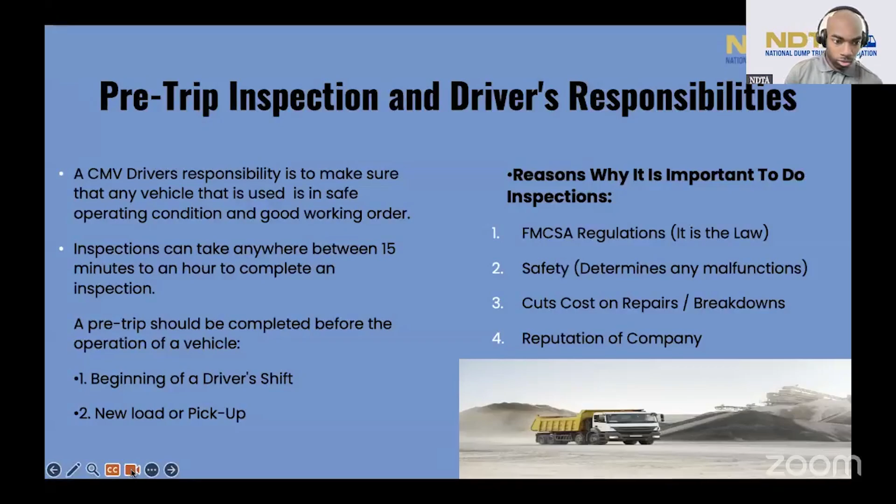Can you see it? Yes. Okay.

So, pre-trip inspection and driver responsibility. A commercial motor vehicle driver is responsible to make sure that all vehicles used are in good, safe operating condition and good working order. So basically what that means is if you drive a commercial motor vehicle and you're a CDL driver, you're responsible to do a pre-trip on that truck at all times.

A pre-trip inspection can take anywhere between 15 minutes to an hour to complete a total inspection. A lot of companies say, oh, 15, 30 minutes. You need to take as much time as you need to make sure your truck is in good working condition. I suggest in doing my trainings, you do at least 30 minutes. Some people, when you're seasoned and you know your truck, do 15 minutes, but I suggest you do between 15 to 30 minutes to an hour to complete an inspection.

A pre-trip should be completed before the operation of a vehicle, beginning of a driver's shift, or a new load or pickup. So that means you wake up in the morning, you get to your truck, you should do a pre-trip right away. That should be the first thing. Once you get in the truck, get your paperwork out, get everything together, do your pre-trip, walk around the truck, check everything. Anytime you pick up a new load, you should do a walk around and check your truck.

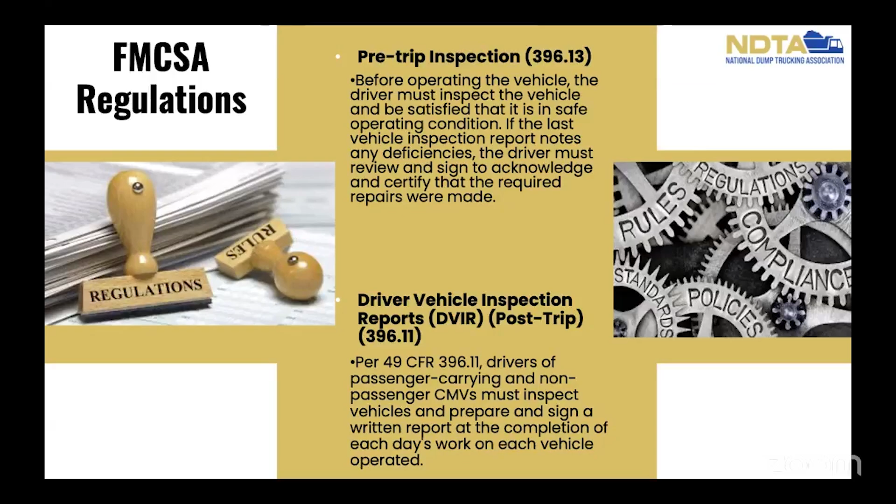So basically, a DVIR is a formal document that confirms that you completed your commercial vehicle inspection, and they can be done in different ways. Some people do paper ones, some people do them on the ELD. It just depends on what your company allows and what the regulations allow you for the type of vehicle you have. There are different settings and different ways you can do it. We can go to the next slide.

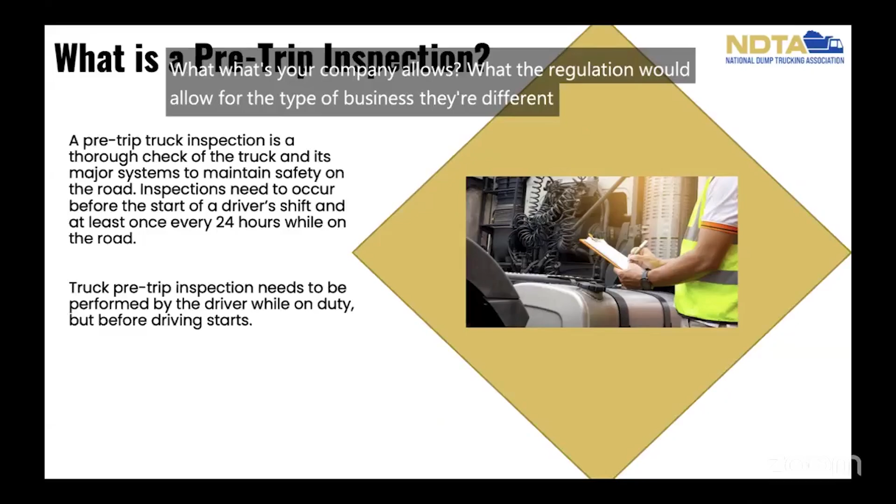What is a pre-trip inspection? A pre-trip inspection is a thorough check of the truck and its major systems to maintain safety on the road. Inspections need to occur before the start of a driver's shift and at least every 24 hours while on the road. Pre-trip inspection needs to be performed by the driver while on duty, but before the driving starts.

So just say you have a truck and you have two drivers. One may do a night shift, you do a day shift. Just because the driver at the end of the night did a post-trip inspection doesn't mean you just jump in the truck. Oh, I read this report, everything looked good. How do you know your owner might have done some maintenance work on it overnight? It could have had damage from weather or something. So it's your responsibility before you do your route that you check the truck and do a pre-trip inspection.

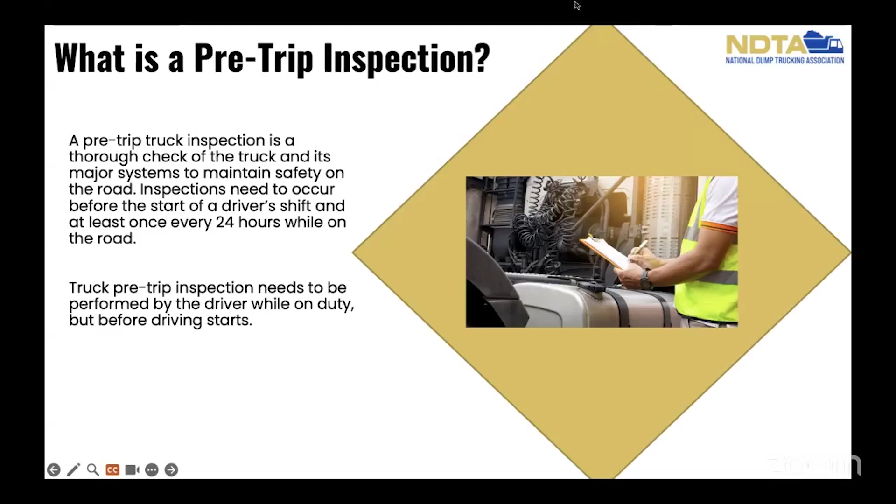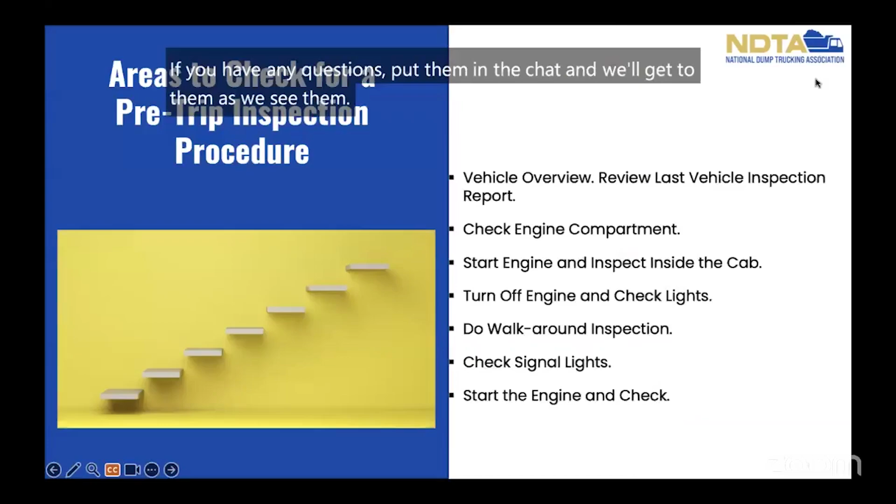Right. Areas to check for a pre-trip inspection procedure. And the first area is the vehicle overview. That's basically just walking around, looking at the outer parts of the vehicle, just checking the overview, checking your last vehicle inspection report. So just say it's Friday, you're getting off, you do your last check, you go home, you park your truck, you come back Monday.

First thing you should do is just overview your vehicle, look at everything, make sure all your paperwork's up to date, look around, and then review your last vehicle inspection report. So see what you wrote Friday to make sure there was nothing pending that you need to get fixed or you left in the shop that needed to be fixed, and confirm that it's been fixed. Check your engine compartment.

That basically means pull the hood up, look under the engine, look around it, make sure nothing's leaking, make sure nothing is wasted on the engine, make sure everything is clean and no debris is there. Start your engine and inspect inside the cab. So always inspect inside your truck.

Make sure your air brakes work. Make sure nothing's protruding or stopping you from pressing on the brake pedal. Make sure your truck is clean. You know, that can be a violation, not keeping your truck clean and safe. Having stuff all on the floor could impact your stopping or cause an accident or something.

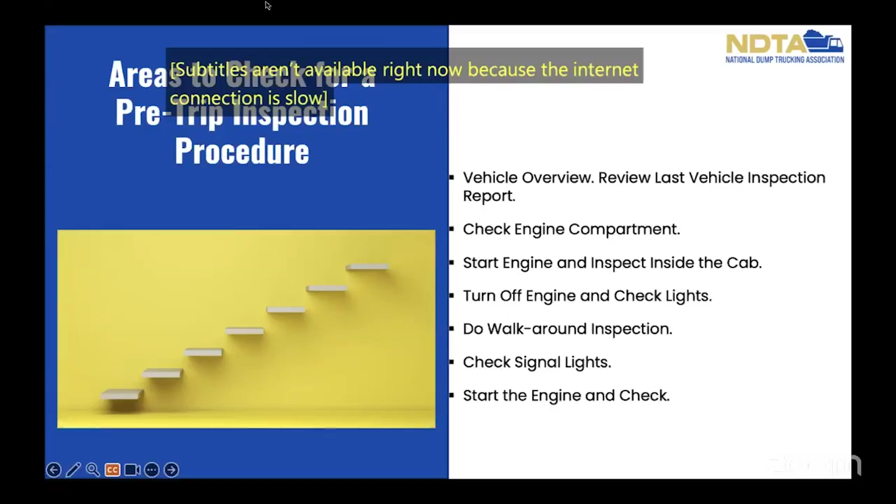Turn off the engine and check lights. Do a walk-around inspection. And that means walk around for your inspection. You know, people say go right to left, left to right. Whatever's comfortable and gets the job done is really based on how you feel about doing it, as long as you do a thorough check and you check everything that's on those checklists. Check your signal lights. This is a big one.

If you have a partner or somebody out there in the area, check your lights, or pull in somewhere where you can look in the back, like a wall or something, and see your lights come on and make sure they're working. Start the engine and check and listen to it. And some guys get up under the truck. If you ever do get up under the truck to check the brakes and everything, make sure you put the chocks behind it so the truck won't roll.

I remember once I was doing an inspection and the guy's air brakes were messed up and the truck started rolling with the chocks. And I shot up from under it. So make sure you take safety precautions too when you do your pre-trip and post-trip. You can go to the next slide.

What is a post-trip inspection? Drivers are required to complete a daily written post-trip inspection report at the end of each day driving. This inspection report must identify the vehicle and list any defects or deficiencies discovered by or reported to the driver which could affect the safety of operation of the vehicle or result in a mechanical breakdown.

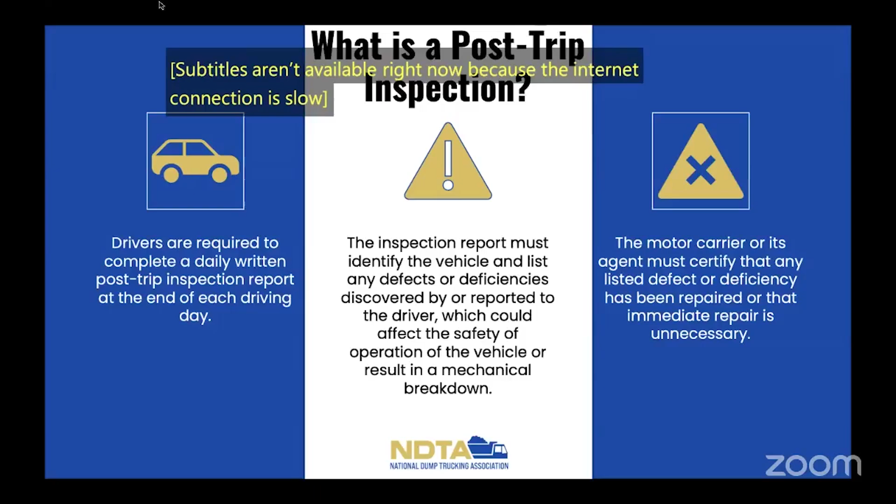You also want to check your coupling devices, your windshield wipers, check all your mirrors, make sure they're clean, your windshield is clean. Make sure your windshield is not cracked. You can get a violation for the windshield being cracked, or your wipers not working. Also, you can get a violation for having caked-up windshield wiper fluid where the cleaner comes out. Make sure that is clean.

Seat belts: make sure your seat belts are operational and you have them on. Your gauges, air brake warning system, make sure that works. Make sure you have your emergency kit. You would be surprised how many people get violations for not having their fire extinguisher secured, not having triangles. These are things you should check once you get in your truck. And don't use your fire extinguisher as a step stool or put your foot on it.

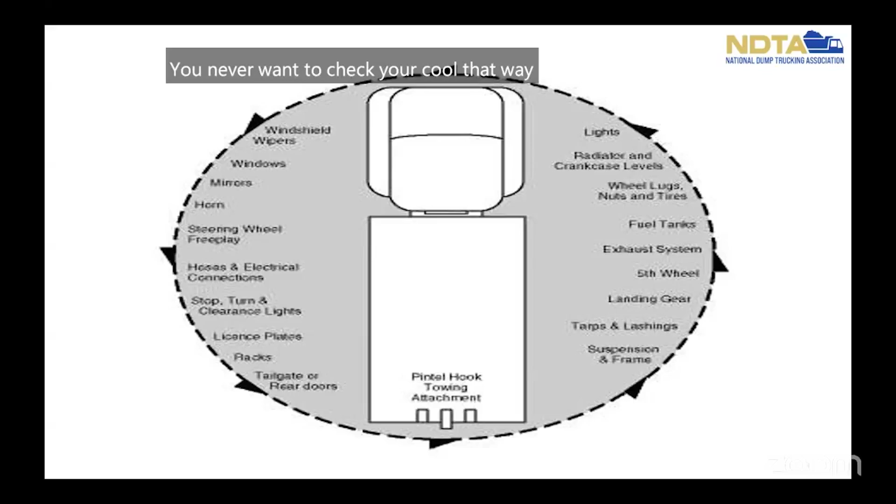If you go at an angle in a circular motion, you can actually see what's under the truck. You can see if something's hanging. You can see if there's stuff in the tires. You can see leaks and stuff. So that's an example of another way you can do it. Like I said, there's no wrong or right way to do a pre-trip or post-trip. You do what's best for you, but make sure you're meeting all the requirements of the Federal Motor Carrier. And we can go to the next slide.

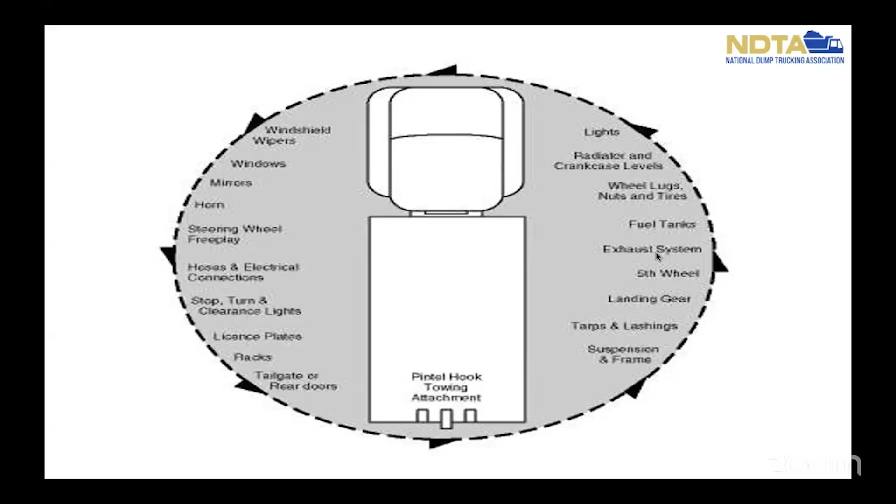Where to document the inspections? There's several ways you can document. Some people use logbook paper. I know some dump trucks don't use ELDs. They have logbooks. They have a pre-trip form. You can buy them at JJ Keller or at the local truck stop. It says driver vehicle inspection report. I remember we used to use those all the time when I was a DOT officer. They would turn those in and we would check them when we did audits or pulled over for level 1, level 2, level 3 inspections. Now you can do it on your ELD and report it.

If I had a company with new drivers, the first thing I would do the first couple of months is make the drivers tape themselves doing the pre-trip and post-trip and turn in the recording, just to get them in a pattern of doing it. Because you don't want to put a brand new truck out there and a couple of months later it's in the shop because it hadn't been checked thoroughly. So record them doing it. Say, hey, I need you to record your pre-trip every morning, just to get them in a pattern and a habit of doing it.

You also can do logbook paper. You can do a digital app. There are several TMS programs and digital apps that you can use for your pre-trip and post-trip, where you can upload it, send it in and save it on the computer. And then your ELD allows you to do it if you have an electronic logging device, which all trucks are required to have after a certain date. There are some exemptions, and that just depends on your certain circumstance.

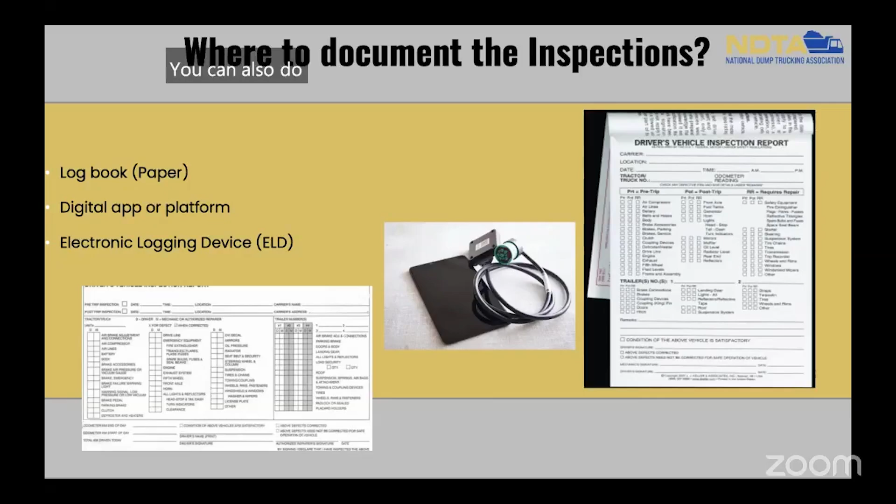We talked about this earlier, about the federal motor carrier regulation violations and fines. Just to repeat it, drivers must perform pre-trip inspections and post-trip inspections as required by the Federal Motor Carrier Safety Regulations. Failure to properly conduct these inspections and take corrective action when needed may lead to CSA violations, fines, or vehicles being declared out of service. If your vehicle is ever declared out of service, it's your responsibility to get it fixed and signed off before you get back on the road.

Federal Motor Carrier takes these violations very seriously, and it can also affect your insurance, affect you getting work and everything. So take this seriously, take the CSA violations seriously. If you get a violation, make a corrective action so it doesn't happen again. Failing to perform pre-trip inspections is a top violation with the Federal Motor Carrier Safety Administration regulations. One of the top violations is not doing a pre-trip inspection. They will write you a warning, it'll go towards your DOT number, and it possibly can lead to fines. So take this seriously.

And it's very important to do. It helps you in the long run. It helps your truck stay up and running for long periods of time, and it also helps your driver have a pattern of keeping safe and keeping the other people on the road safe.

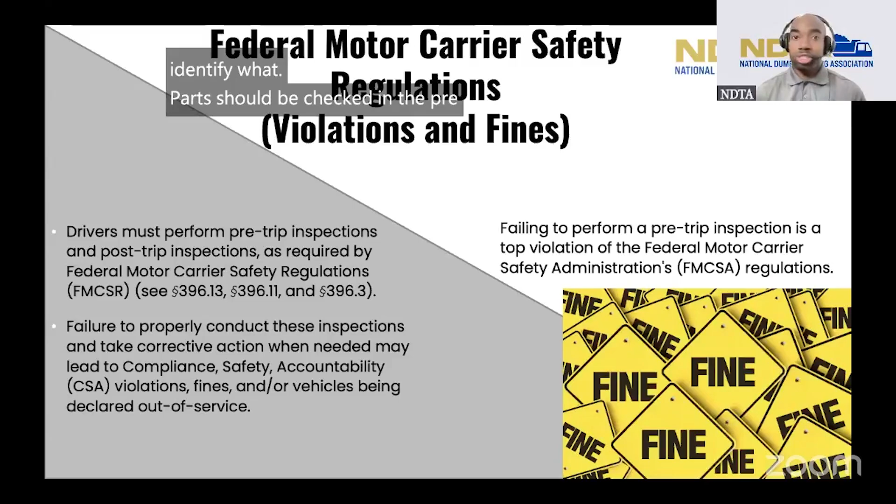Okay, so guys, I know we were supposed to have a live pre-trip today, but the weather was a little iffy and we just didn't want to chance it. So what we did was record a video for you guys to see a proper pre-trip and the things you should actually look for. If you have never been inside a truck, been around a truck, or seen a dump truck, we wanted you to be able to identify what parts should be checked in the pre-trip. As Jonathan alluded to, there are certain parts that you have to look at and check, and we wanted you to be able to identify those parts even with no knowledge of trucks.

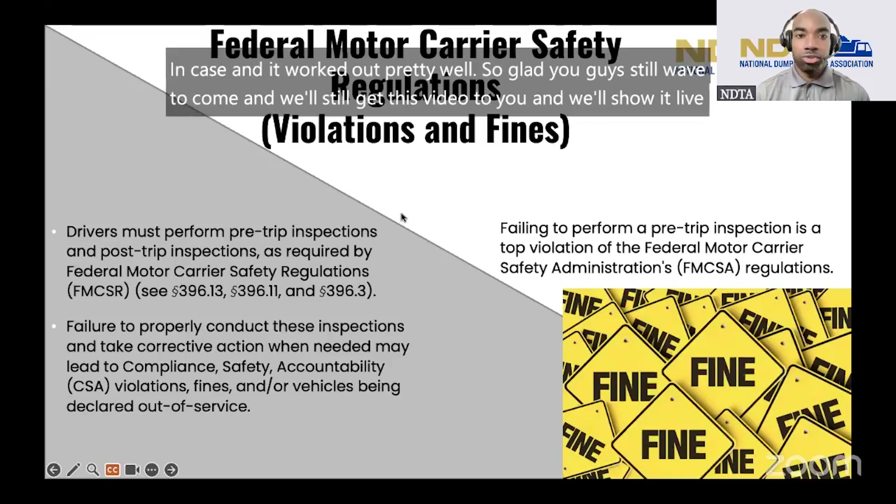All right, guys, welcome back. As we promised, we have a pre-trip video showing you how to do a proper pre-trip, so you can identify the different parts, what they look like, and what you should be looking for. This is on a Mack Granite truck. Some things may look different depending on your truck, but it's all the same when you hear the language and see what to look for: okay, this is what the air filter looks like, this is what the coolant looks like. So thank you guys again for coming and enjoy this video.

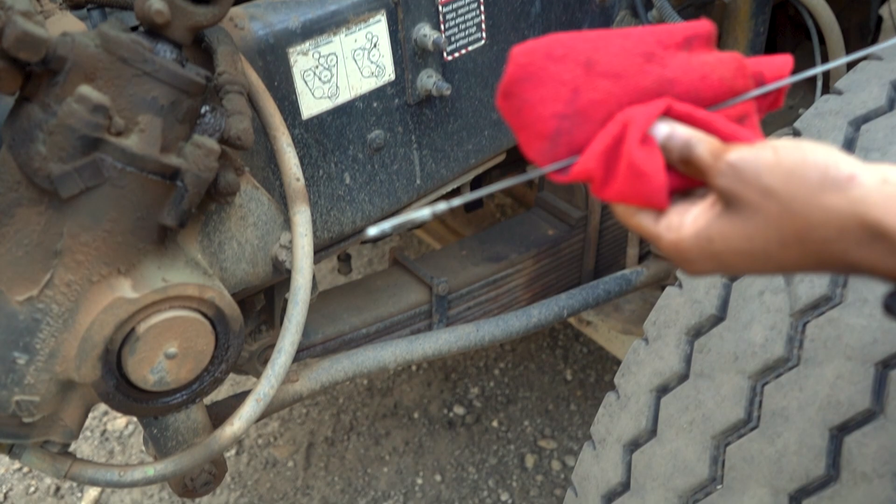Hi, ladies and gentlemen. Today we're going to start our pre-trip inspection from underneath the hood. I like to start off by checking my oil first. You see I already have my rag here. We're going to pull this dipstick out. You're going to wipe your dipstick clean. Put your dipstick back in. Okay.

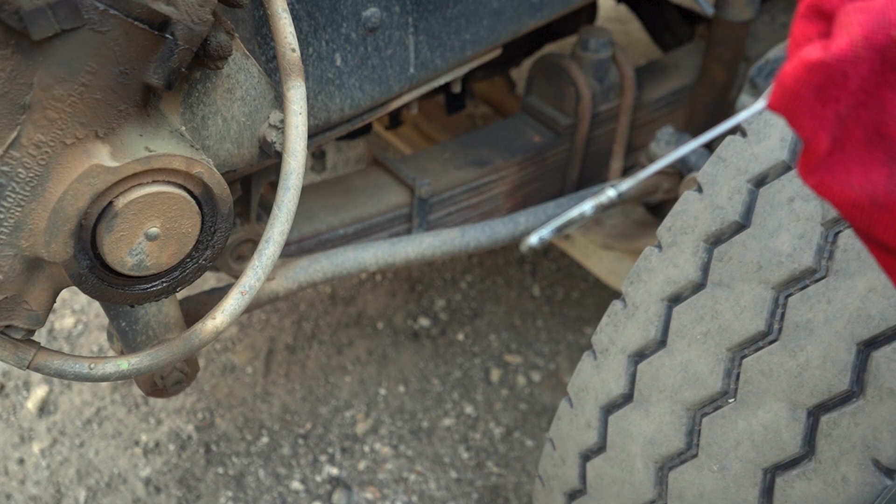Pull your dipstick back out and check your oil level. As you can see, the oil is at its full line. The oil is still pretty clean. It's not thick. You don't want it all thick and sluggish. That'll clog up your engine. And there you have it.

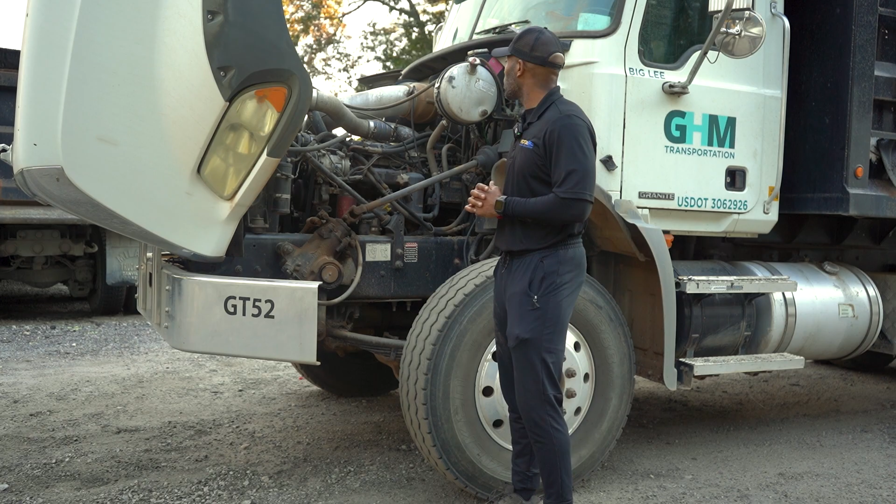And next, we're going to check our coolant. Always be sure to check your coolant while the truck is cold. You never want to check your coolant while the truck is hot. In the event that you have to check your coolant while the truck is hot, make sure you use this little glass window right here, and you can look in and check your coolant to see if it's coolant inside there. You want to make sure that your coolant is at the right limits.

Next, you're going to want to check your belts. Your belts are located right here in the front of the truck. You're going to make sure that they're not worn or frayed. You want to make sure that they have proper tension on all devices that they're on.

Here we have your leaf springs. You should make sure that your leaf springs are not cracked or none have slid. This can be a very costly repair to your suspension in the event that any have shifted or cracked. Please make sure you check them periodically. And also check your slack adjusters.

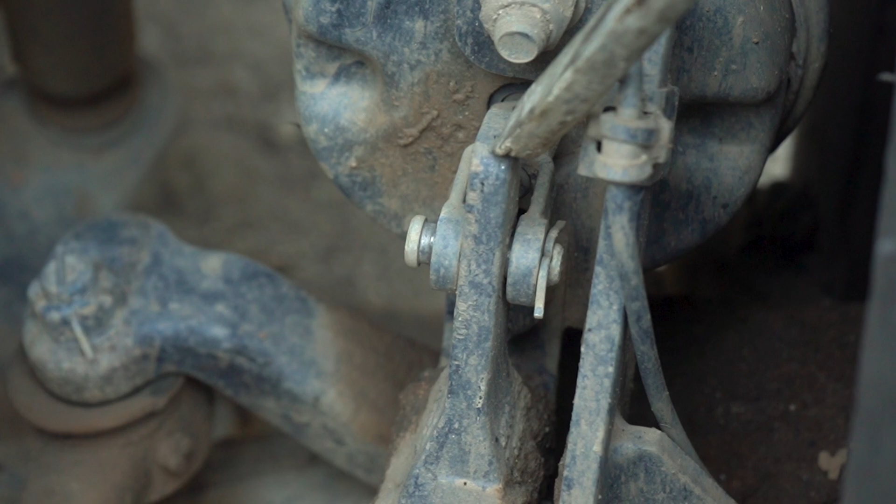Here, ladies and gentlemen, you have your slack adjusters. Your slack adjusters are very critical to the brakes engaging. You definitely want to make sure that you have 2 inches in between your slack adjusters and make sure they're lubricated. If your slack adjuster is out of adjustment, that means you can have problems with your braking system.

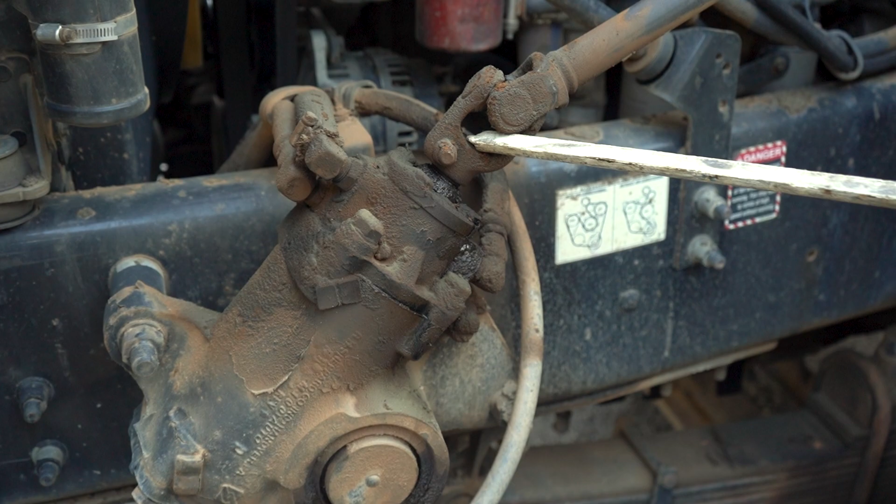Next, you're going to want to make sure you check your U-joints. This is a U-joint right here. You want to make sure that nothing is lodged in between this U-joint. Also, you're going to want to check your U-bolts right here. Your U-bolts are attached to your leaf springs. Make sure that you check your leaf springs as well and make sure that none have shifted or cracked. You're gonna wanna check your tie rods.

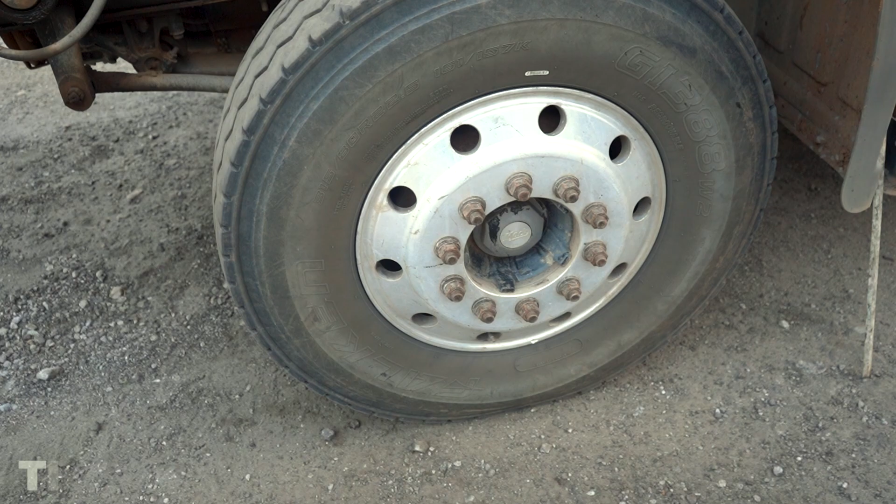One of the most important parts to me are the tires. Making sure that your tires are properly inflated is a must. You don't want your tires to be underinflated or overinflated. I personally like to have my tires between 90 to 100 PSI, but when in doubt, check right here for the manufacturer specification for how much PSI your tire can handle.

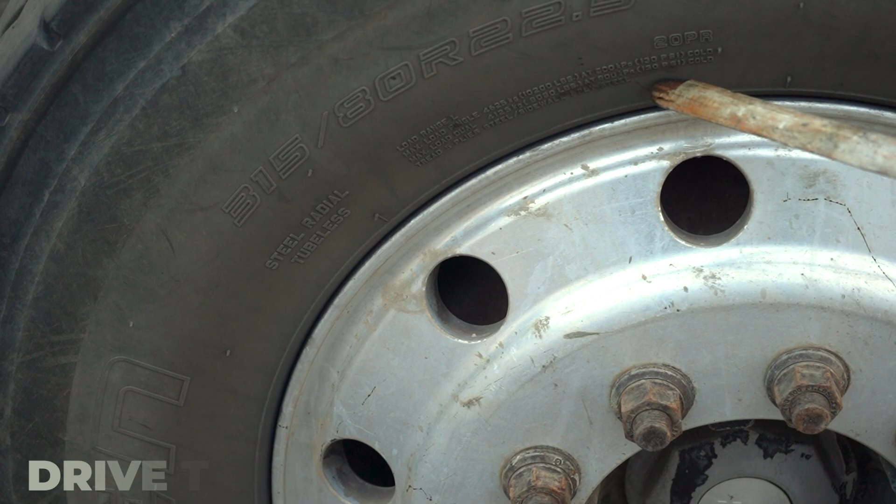Also, you're gonna wanna make sure that your tire tread is 4/32. In the rear, it's 2/32. For your steer tires, 4/32. For your drive tires, 2/32.

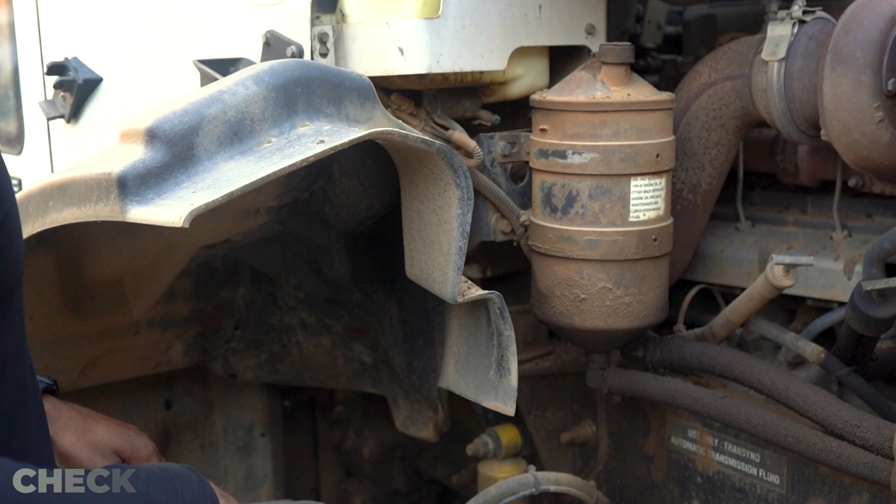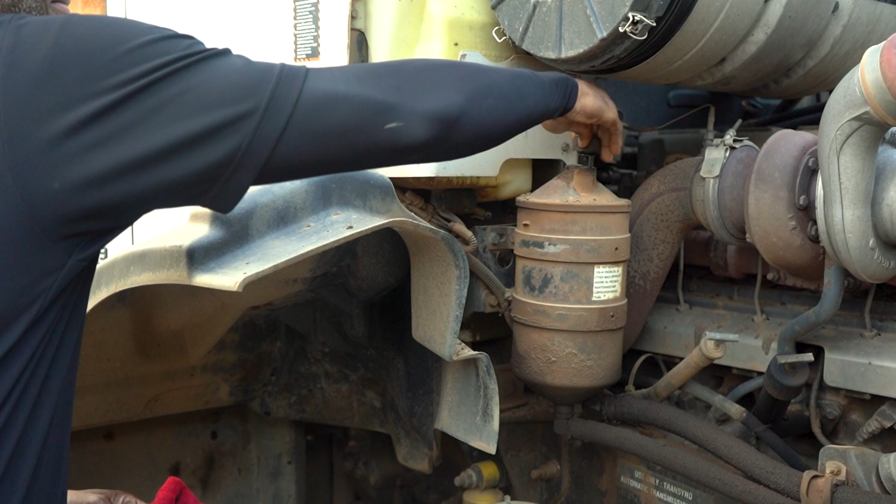Now we'll be checking our power steering fluid. Our power steering fluid is just like our oil with a dipstick. We're gonna pull it out of its reservoir, wipe it clean, stick it back into its reservoir, check the limit. Here we see it's at its full limit. There you have it. Hi, ladies and gentlemen.

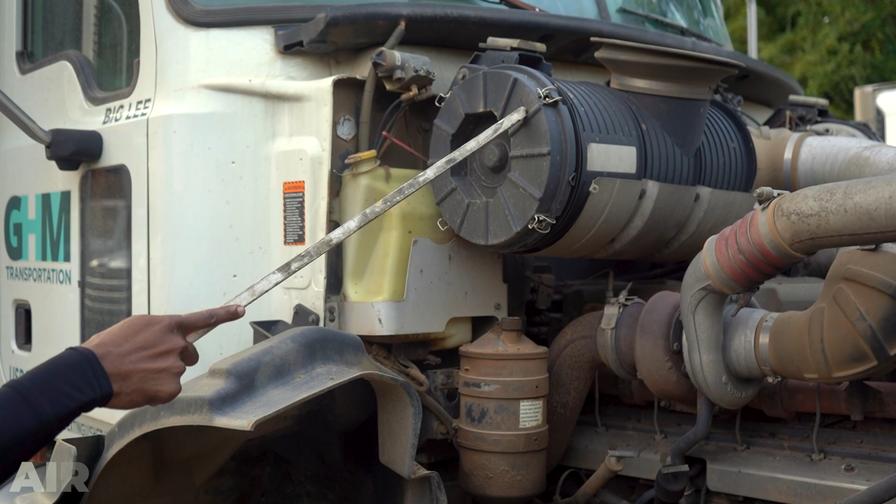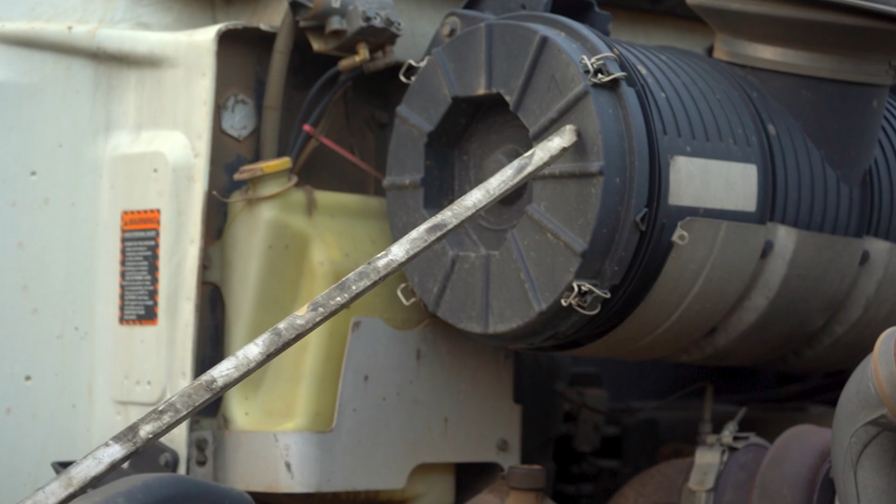Now we're going to check our air filter. Your air filter is located inside this housing located right here. You're going to want to unlock these latches and pull your air filter out. Your air filter is going to be very dusty due to being on job sites and there's a lot of dust in the field. So periodically you're going to want to check this air filter, pull it out, and I use a hose inside my truck to blow it out, or I kind of just beat it on the ground and get as much of the dust and dirt and debris out of it as I can.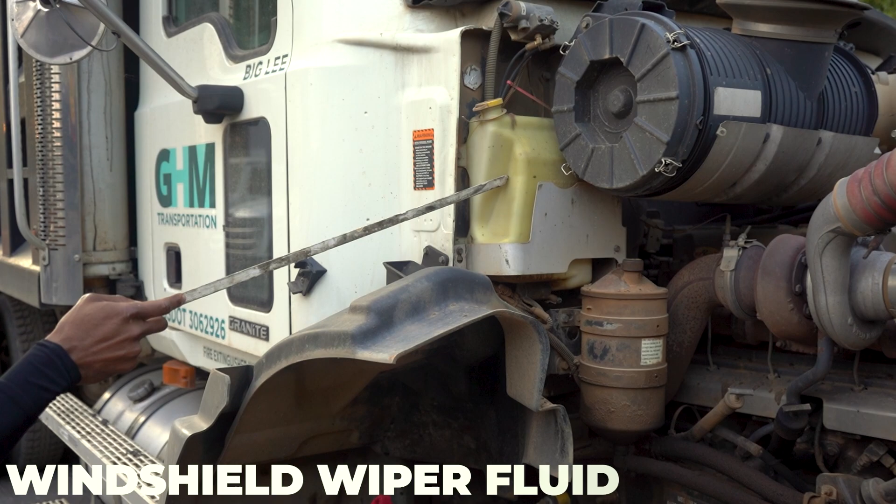Next, you're going to want to check your windshield wiper reservoir. It's right here. This is where you put your windshield fluid. Make sure that it's at its proper limit. Please make sure to check all lights on your vehicle. This includes your low beam headlights, your high beam headlights, your signal lights, your brake lights, and that is all.

Always make sure to check your tarp system. This is your tarp system right here. It extends from the front of your cab to the back. What it does is it covers your load to keep your load secure while you're driving.

Also, make sure that your dump bed goes up and down. You definitely don't want to get loaded and then get to the dump site and then your bed can't go up and you have a load of rock on the back that you can't get rid of. While checking the bed, you're going to want to make sure that you're checking your latches. Your latches are right here. You have two latches, one on this side and one on the other. Please make sure that they are latched properly before heading to the job site.